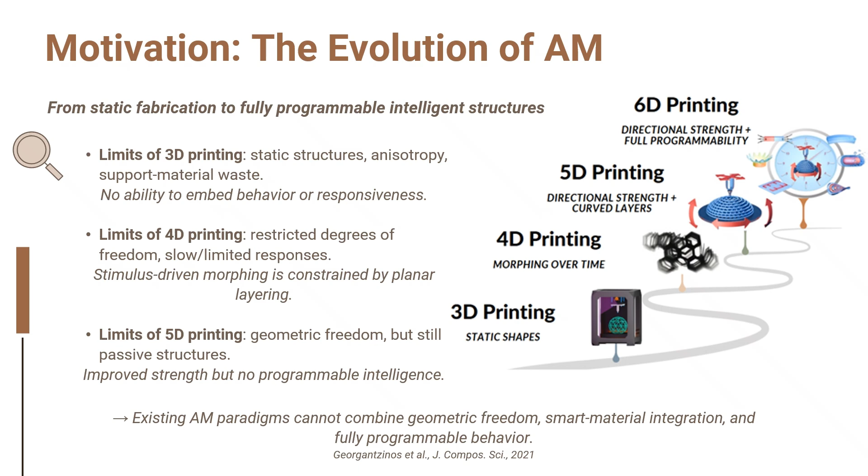So the challenge is clear. None of these paradigms, 3D, 4D, or 5D, can simultaneously combine geometric freedom, smart material integration, and fully programmable behavior. This gap is exactly what motivates the shift toward 6D printing.

Today's AM can produce complex shapes, but it cannot deliver structures that autonomously adapt, evolve, or reconfigure themselves. That is the fundamental limitation, and this is exactly where 6D printing introduces a paradigm shift. Tomorrow's structures must be far more than static components. They must be able to sense their environment, respond to external stimuli, adapt their behavior, repair themselves, and in some cases even learn from repeated interactions.

These requirements are emerging across aerospace, robotics, biomedical implants, soft machines, and infrastructure. To achieve this, AM must progress from single shape making to behavior programming. In other words, we are no longer designing only geometry. We are designing how a structure will behave throughout its lifetime.

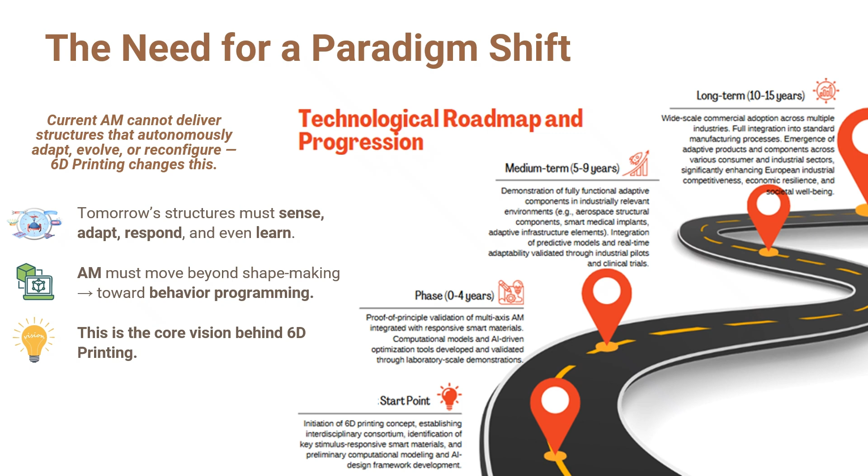This entire vision, structures that are shaped, activated, and programmed at the moment of fabrication, is the essence of 6D printing. Now let's define exactly what we mean by 6D printing. 6D printing is a manufacturing paradigm that merges three capabilities: multi-axis fabrication from 5D printing, stimuli-responsive smart materials from 4D printing, and the encoding of programmable behavior directly into the printed structure.

In practice, this means that we are no longer just depositing material, we are depositing function. We control the geometry with curved layer, orientation controlled printing. We control the material through smart polymers, composites, and multi-material combinations. And we control behavior by designing how the structure responds over time to heat, stress, magnetic fields, or other stimuli.

So the question is, what exactly is the sixth dimension? It's not an extra spatial axis, and it's not time. The sixth dimension is intelligence: the ability of a structure to adapt, evolve, or reconfigure based on encoded behavior. Behavior is no longer an afterthought. It is printed into the object itself through its material composition, its internal architecture, and its toolpath-driven orientation.

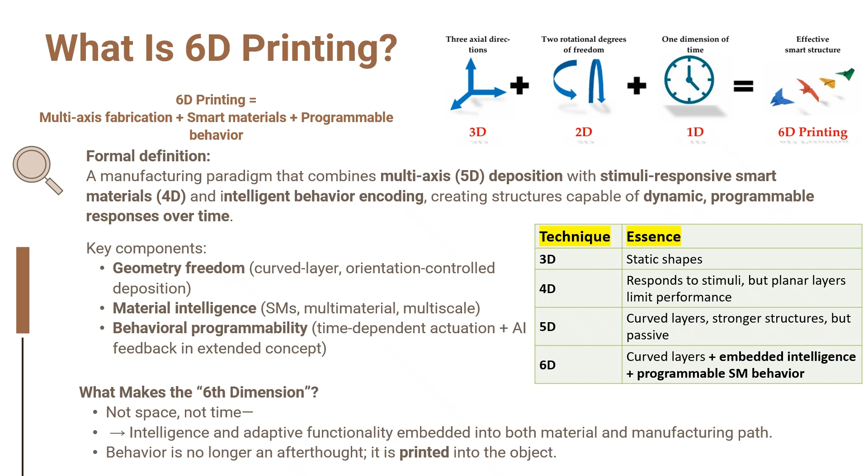To understand how 6D printing works, we need to look at its scientific foundations and the workflow that connects them. Everything begins with smart materials, polymers and composites that respond to external stimuli such as heat, pH, mechanical stress, electricity, or magnetic fields. These materials provide the intelligence layer that allows structures to move, morph, or change properties after fabrication.

Next, we enhance these materials with nano-reinforcements. Nanoparticles, nanoribbons, and nanosheets greatly improve strength and multifunctionality. They also allow us to fine-tune the response, for example, faster actuation, stronger bending, or increased sensitivity to a specific stimulus.

The third foundation is behavior encoding through deposition paths. Because 6D printing uses multi-axis deposition, we can orient fibers in smart domains along any direction, not just flat layers. This curved layer orientation controlled printing effectively tells the structure how to act when stimulated.

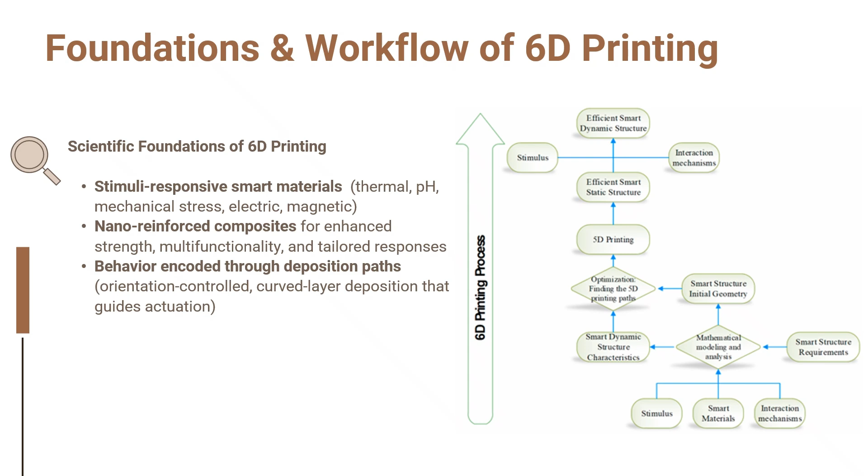Then, through optimization, we determine the right multi-axis toolpaths, apply 5D printing, and finally evaluate the static and dynamic behavior under stimuli. The result is an efficient smart structure, first statically and ultimately dynamically capable of precisely controlled actuation and adaptation. 6D printing is powerful because it integrates two forms of intelligence, process intelligence and material intelligence. And it's the combination of these two that enables truly programmable structures.

On the process side, multi-axis deposition gives us unprecedented control of filament orientation. We can align extrusion paths with stress trajectories, which significantly improves mechanical performance compared to planar layering. This also means we can locally tune stiffness, actuation direction, and response speed simply by adjusting the orientation of the toolpath. Another major benefit is the reduction of support material. Because we can print on curved surfaces and in multiple orientations, we eliminate many of the support structures required in 3D printing, leading to 30 to 50% material saving and faster fabrication.

On the material side, we integrate smart materials such as PLA/TPU bilayers, hydrogels, shape memory polymers, and advanced nanocomposites. Nanofillers such as carbon nanotubes, graphene, or iron particle systems amplify the actuation force, sensitivity, and overall functional response of the printed part. When we combine these materials with curved layer deposition, the interface geometry governs how the structure morphs. The intensity of bending, the direction of actuation, and the degree of programmability become controllable design parameters.

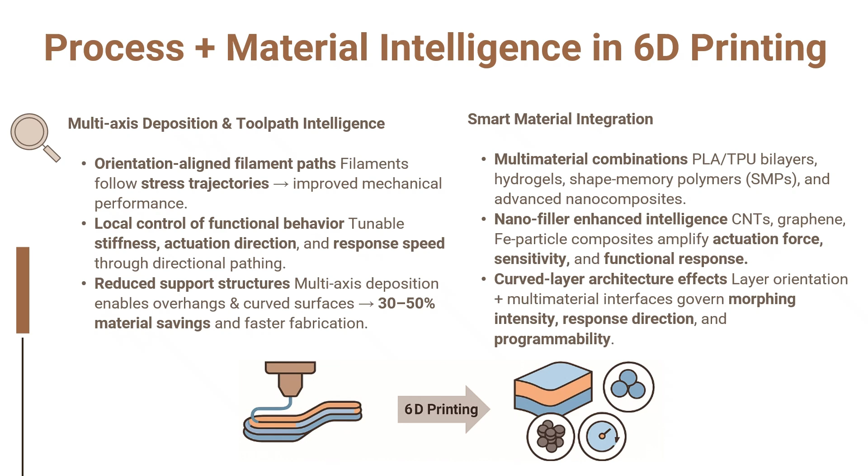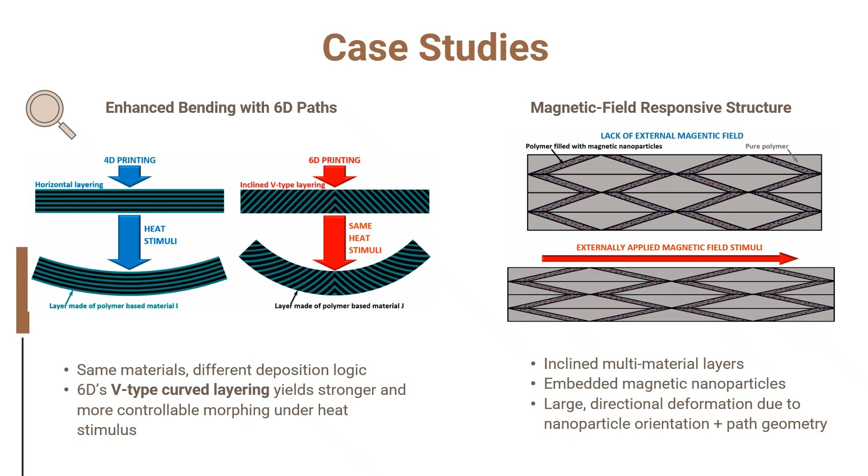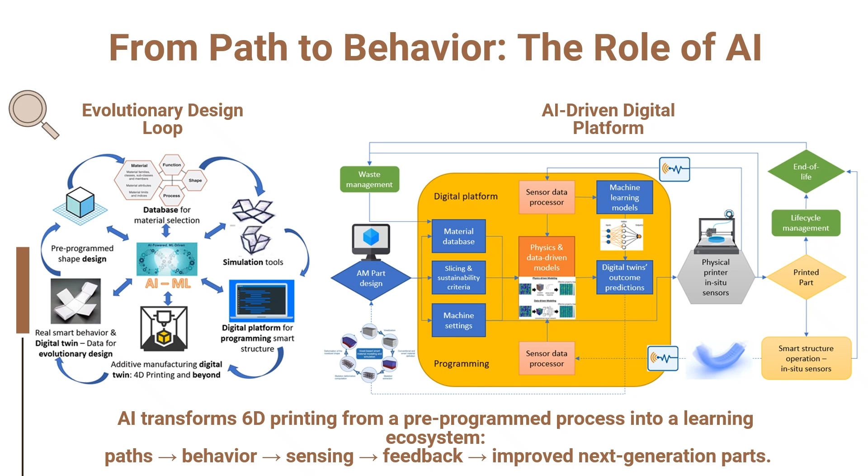6D printing is not just an incremental improvement in additive manufacturing. It unlocks entirely new application domains across multiple industries. Let me highlight a few examples. In the biomedical sector, 6D printing enables adaptive implants and medical devices that can reshape or respond to physiological stimuli. We are talking about orthopedic implants that match patient curvature and change stiffness during healing, vascular grafts or stents that react to pressure or biochemical cues, and prosthetic interfaces that dynamically adjust to a patient's anatomy and improve comfort and function.

In aerospace, the potential is equally transformative. We can produce morphing wing components that bend under aerodynamic loads and return to their original shape, deployable or reconfigurable satellite structures with embedded actuation, and smart vibration dampers that tune the stiffness in real time to protect sensitive equipment. Finally, in civil and infrastructure applications, 6D printing enables structures with built-in resilience and adaptability. For example, self-healing joints that respond to stress signals, dynamic facade elements that reconfigure based on climate or sunlight, and intelligent pavement sensors that change stiffness under load and provide real-time information about traffic or structural health.

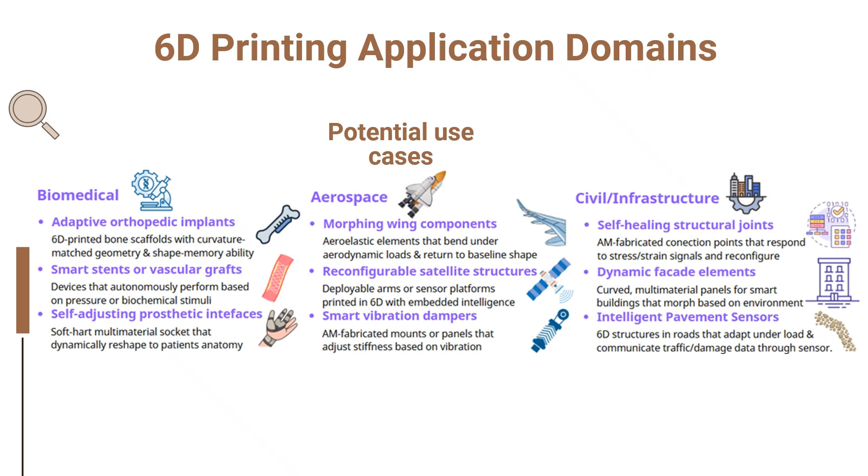Across all these domains, the ability to print both geometry and behavior at the same time is what fundamentally differentiates 6D printing and gives it such broad disruptive potential. At this point, the question is not just what 6D printing is, but why it is fundamentally disruptive compared to 3D, 4D, and 5D printing.

First, structural strength can increase by up to a factor of 3. This comes from curved, stress-aligning toolpaths that follow real load trajectories, something traditional planar printing cannot achieve. Second, the stimulus responsive speed improves dramatically. Because we can orient material domains in 3D space, actuation becomes 2 to 4 times faster, whether it's thermal, mechanical, electrical, or magnetic. Third, 6D printing is far more material efficient.

Multi-axis deposition reduces the need for supportive structures, saving 30 to 50% of material while also improving surface quality. This naturally leads to waste reduction. We see reductions of 50 to 70% of unnecessary filament use, support material, and post-processing. Fifth, multifunctionality increases. With 6D printing, we move from single-function components to structures with 2, 3, or more integrated functions, such as sensing, actuation, stiffness tuning, and even self-healing.

And finally, programmability. This is the true disruptor. Behavior is not added afterward, it is encoded directly into the deposition paths and the smart material architecture.

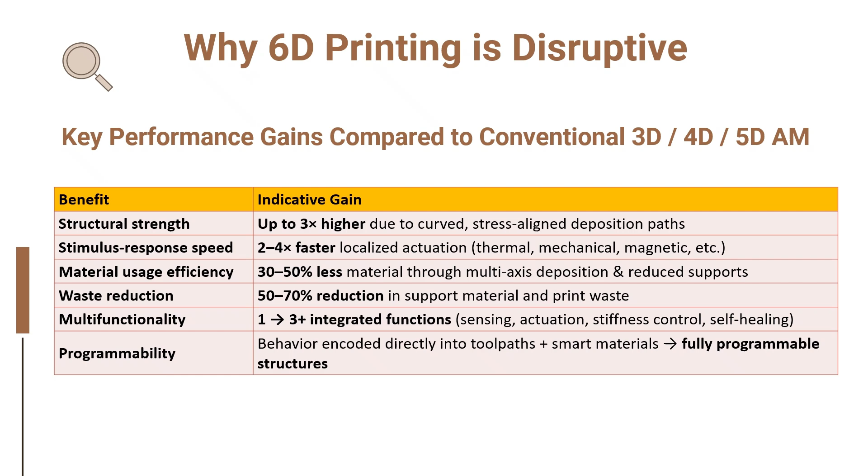Let's look at the long-term vision enabled by 6D printing and intelligent adaptive manufacturing ecosystems. The first pillar is fully autonomous adaptive structures. These are structures that do not just respond once, but continuously self-adjust throughout their lifetime, adapting to load, temperature, damage, or environmental change. Second, 6D printing aligns naturally with zero-waste circular manufacturing.

With multi-axis deposition, material-efficient designs, and integrated sensing, we can create closed-loop material flows and reduce environmental impact across the entire life cycle. Third, we move toward materials that evolve and learn from use. Through embedded sensing and AI-driven feedback, the behavior of the structure is refined over time, creating adaptive materials that improve with experience. Fourth, this vision transforms biomedical engineering.

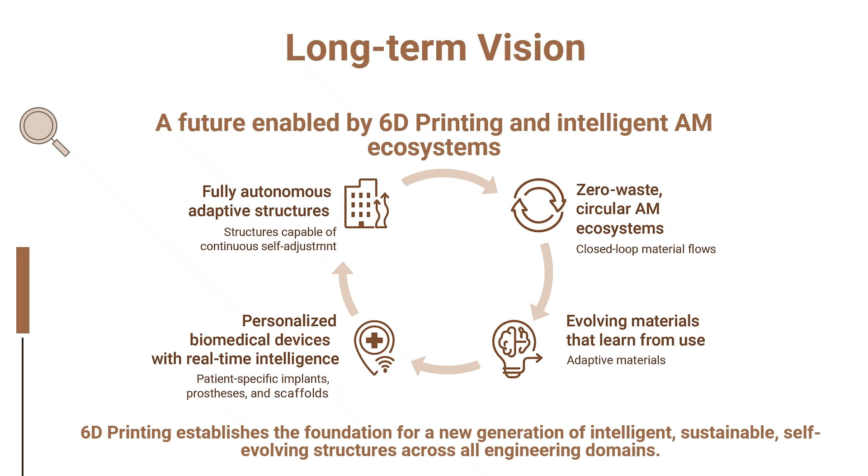Imagine patient-specific implants, prostheses, and scaffolds that not only fit perfectly but also adapt in real time to physiological changes, becoming part of a dynamic interaction between the human body and the printed device. Together, these pillars define a future where engineering systems are intelligent, sustainable, and capable of self-evolution. 6D printing lays the foundation for this future, a new generation of smart adaptive structures across all engineering domains.

Although 6D printing opens a new frontier, several key challenges remain before it can reach full industrial maturity. The first challenge is material process compatibility. Smart materials such as SMPs, hydrogels, and nanocomposites must be processed reliably using multi-axis deposition. This requires controlling melt behavior, viscosity, nano-reinforcement dispersion, and ensuring that the material stimulus response functionality is preserved throughout printing.

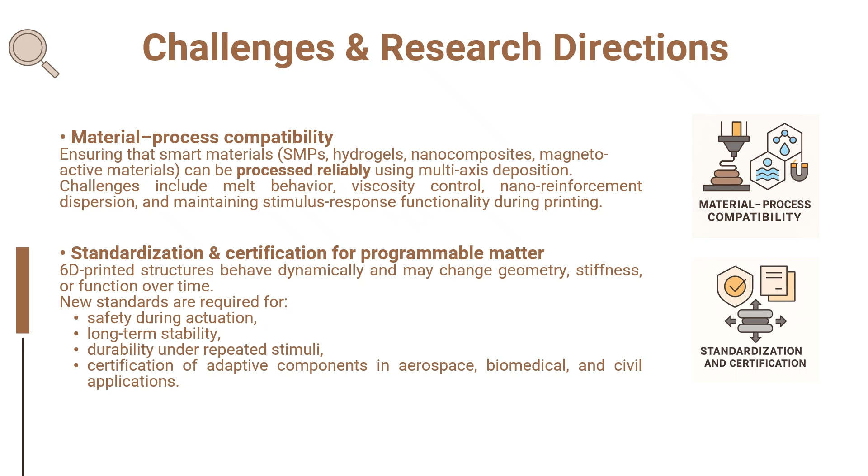The second major challenge is standardization and certification. Because 6D printed structures can change geometry, stiffness, or function over time, traditional certification frameworks no longer apply. We need new standards for safety during actuation, long-term stability, durability under repeated stimuli, and for approving adaptive components in aerospace, biomedical, and civil applications. Addressing these challenges is essential to move 6D printing from laboratory demonstration to large-scale real-world deployment.

Another key challenge for 6D printing is the need for accurate multi-scale simulation and predictive design. Because behavior is encoded during printing, we must understand what happens from the molecular level, polymer chains, and nanofillers up to the structural level under real stimuli. This requires molecular dynamics models, finite element simulations, and coupled multi-scale frameworks that link nano, micro, macro behavior. These predictive tools are essential to design optimized behavior encoded toolpaths.

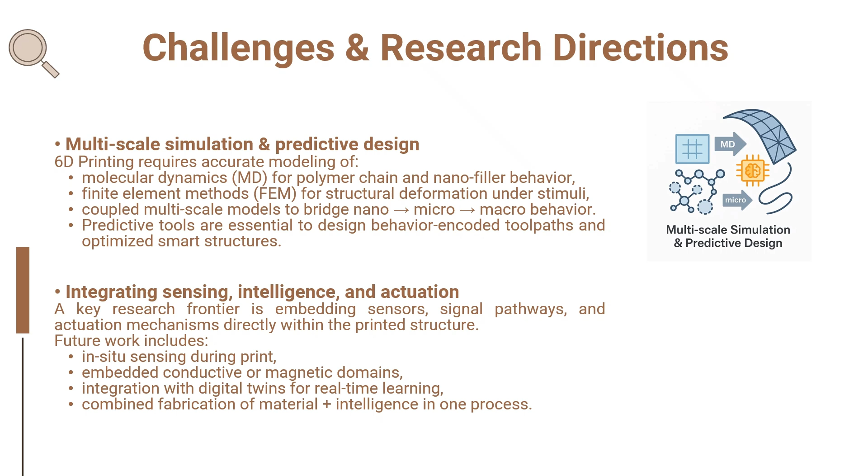A second major frontier is integrating sensing intelligence and actuation directly into the printed part. Future work focuses on in-situ sensing during printing, embedding conductive or magnetic domains, linking structures with digital twins for real-time learning, and ultimately fabricating material intelligence in a single, unified process.

To conclude, 6D printing represents a fundamentally new design ontology, one where geometry, material, and behavior are programmed together from the very beginning. By unifying multi-axis curved layer fabrication with smart materials and behavior encoded directly in the toolpath, 6D printing introduces a completely new design language. This new paradigm bridges manufacturing with intelligence.

Unlike 3D and 4D printing, which remain limited by planar layers and predetermined responses, 6D printing fully integrates AI-assisted modeling, multi-scale simulation, and digital twin feedback loops. This connection between fabrication, sensing, and real-time adaptation is what makes the technology transformative. The outcome is a new class of adaptive high-performance structures. Stress-aligning curved toolpaths produce stronger and more responsive parts.

Multi-material interfaces and embedded smart domains enable fast and accurate morphing, and the reduction in support structures improves both material efficiency and sustainability. These capabilities have already been validated through early case studies, including thermally activated bending and magnetically driven actuation, and they point toward a future where structures are not just made, but intelligent, adaptable, and self-evolving.